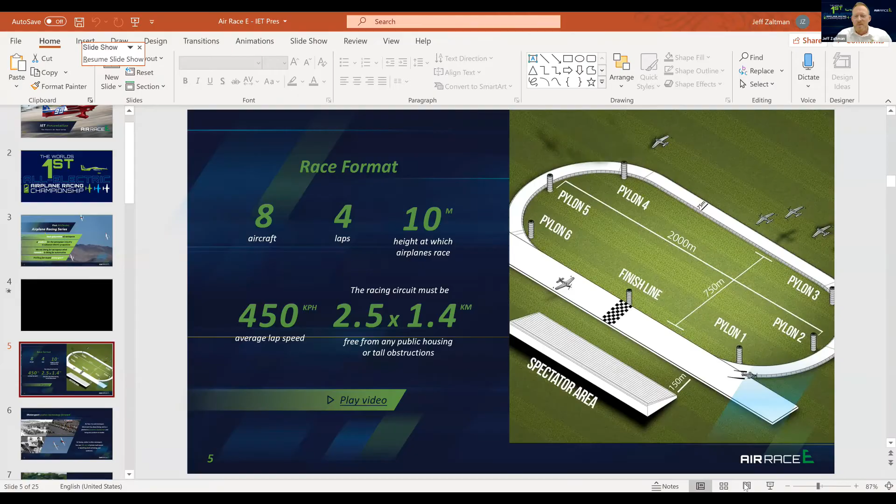Okay, so hopefully that came across okay. It's, as we said, a very exciting sport, and it's important to mention.

What you saw there was coming from a format we currently do. It's an air race called Air Race 1, a form of Formula One air racing. That's the format - it's actually a sport that's been around for over 70 years, a really, really successful race format.

It's super exciting. It's got 8 planes lining up on the runway all together at the same time, they drop the green flag, and they take off, racing from the start. They climb to about 10, 15 meters above the ground, up to 450 kilometers an hour around an oval circuit. The first one to cross the line wins. So it's real pure motorsport, really exciting.

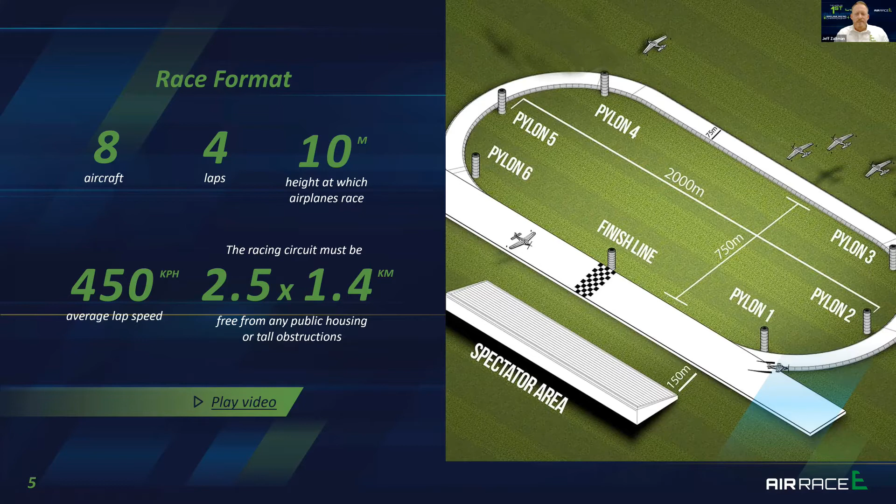And the reason that's important is because Air Race E is basing itself very much on the format of Air Race 1, this Formula One air racing, but of course readapting it for electrification. So what you saw there is very much how it's going to look on the electric side. As we said, it's very much a motorsport, real pure motorsport.

You'll all be familiar with the fact that motorsport throughout history has always been used as a very successful foundation for developing products, developing technology, bringing products to market, and innovation in general. And air racing, though not as well known as some other motorsports, also has a rich history and is very much part of the fabric of aviation.

Air racing goes back over 100 years, started in France in 1909, and has taken on different formats, different disciplines throughout history. But it's always been very essential, and also used, just as automotive or land-based motorsports, in innovation.

Perhaps one of the more famous examples is the Spitfire, which of course was one of the most famous and successful warbirds from World War II. That actually began life as an air racer - it was built for the races in the Schneider Trophy in the 1920s. So that was actually designed for the mission of racing before it was repurposed for battle.

And that's again what we're really trying to do - to hone technology for other purposes outside in the world. Of course, we're a thrilling fan-based sport, so it's a motorsport, it's very exciting, but we're really trying to also do something very, very meaningful.

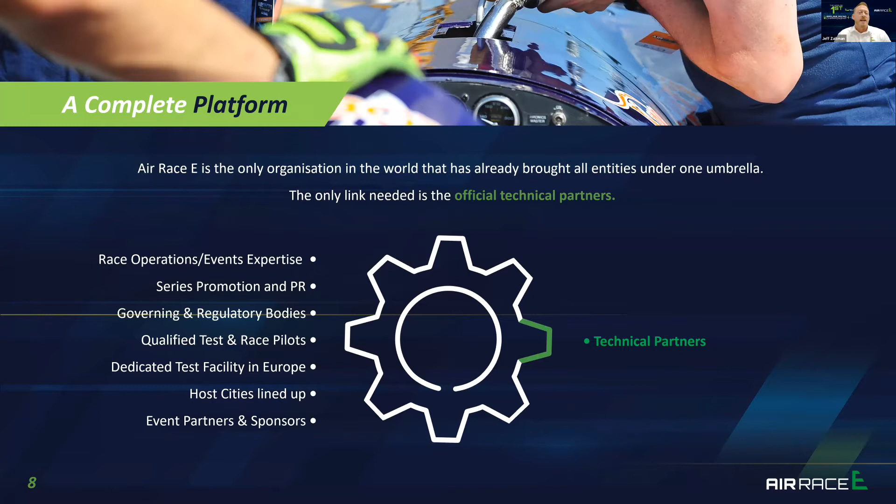Of course, what we didn't have was the technology side. So we're really fundamentally opening that up to the broader market to say, look, we need the industry to come in and start developing this technology with us to make the racing exciting and, as I said, meaningful. So we've done that, and we have a lot of success. We have lots of different companies involved, in different ways.

We refer to this as our stakeholder ecosystem, because some of these are suppliers, supporters of teams, partners, some of them are teams, and some of them are sponsors and partners of this series. Obviously University of Nottingham here is a very important partner of ours. A couple of others you can see here, which are clearly very critical partners, are Airbus - our founding partner. They came on board a couple of years ago, and they've done a really great job of helping us get off the ground.

And ANSYS, which is really taking a very hands-on and integrated role with the teams, helping them use their world-leading simulation software to really develop and help speed up the prototyping process for the team's development, to get them to the starting line so that they're ready by race day. They've been a fantastic support using their software with the teams, helping them use it as well.

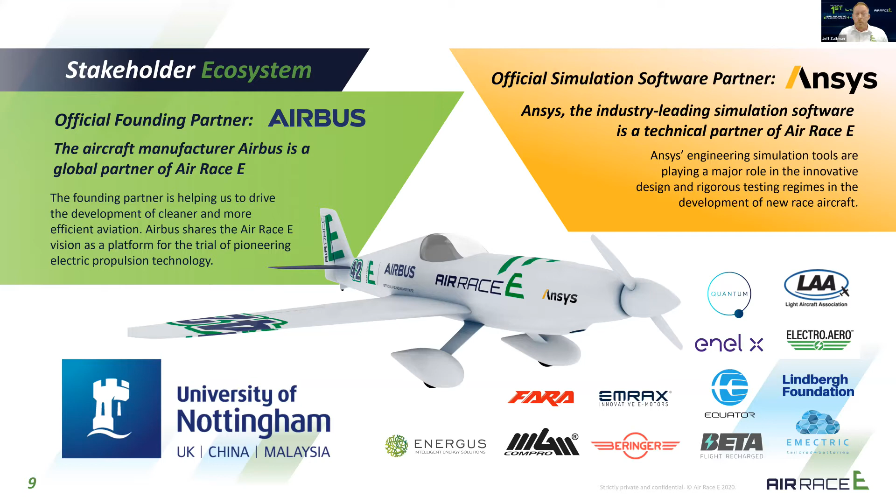Perhaps it's important to mention, I like saying Air Race E is a real world mission. It's a race—there's winners, losers, there's an objective, and you can measure your performance, success and failure. It's really important that we have this real world mission of a race to be able to push the limits of innovation. As you all know, when we talk about motorsport, it really is competition that drives that innovation.

So we've got to mention the rules here. It all really fundamentally comes down to the rules. What we do, as I mentioned, is base our rules on the Formula One air racing rules, which are the other races we organize, and just change what's necessary. Of course, there's a lot of safety procedures and expertise and good rules that have been baked in there for 75 years, so we don't want to change all that. What we want to do is convert it to electric.

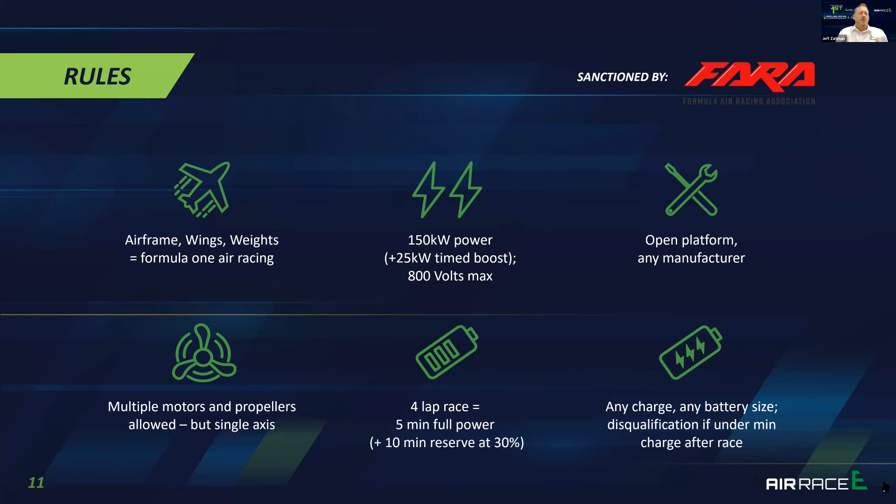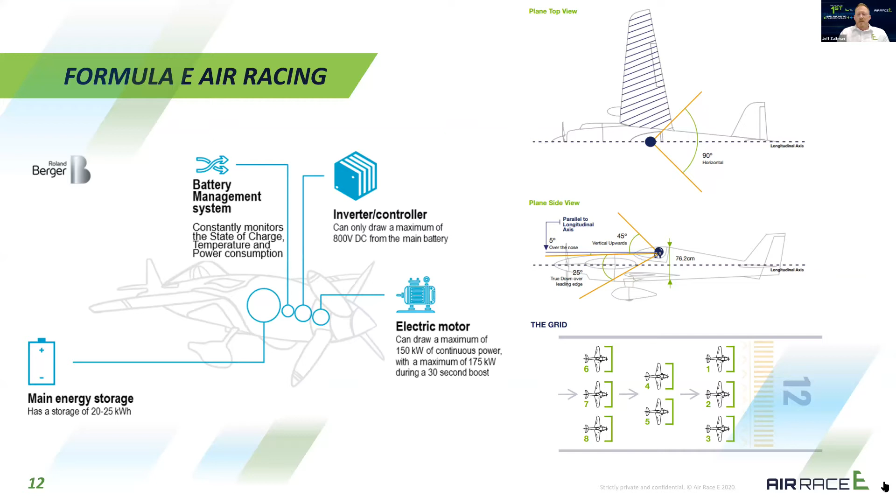So yeah, I'm going to come back in a moment. What I'm going to do is hand over now to Richard—he's got some really exciting, all the juicy stuff you want to hear about. And then I'll come back and tell you a little bit more about the teams and our future plans, and go from there. So, Richard.

So my name is Richard Glassock, and I work at University of Nottingham as a research fellow. I've been there about 5 years now, originally from Australia, and I've done some other work in Europe. It's a real pleasure to be invited here to speak for the IET, and thank you very much to you guys and to Rimesh. So let's carry on and see how we go here.

We have a real interest at the university in developing electric systems, electric propulsion systems in particular, and we have a fairly good footprint into the aerospace industry at large. To show some of the skills and technology that we develop, we wanted to have a demonstrator platform.

I met Jeff about 3 years ago, and we started to discuss how we could go forward, maybe together, and do our demonstrator at the university to help Jeff's ambitions in racing, because we could see how that would be a brilliant way to demonstrate electric propulsion technology for aircraft.

Jeff actually had the airplane flown into our local airfield here at Nottingham and handed over, and we brought it into the laboratory where we have a lot of good facilities to work on this kind of vehicle.

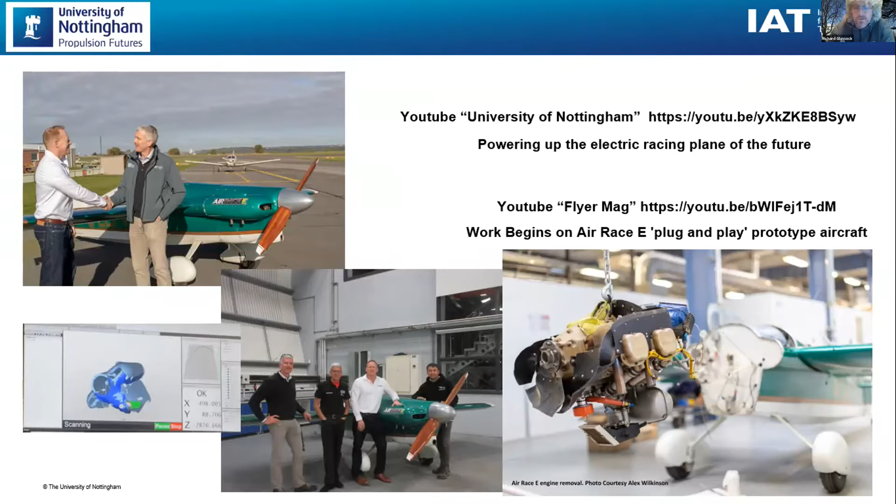We wanted to phase the project in two main stages, phase 1 and phase 2. Phase 1, which we're nearing completion of, mainly uses commercial off-the-shelf components for integration, forming a baseline for the aircraft to operate and for everyone to learn what's going on. We're happy to share all the details of that, which I'll go through later. Phase 2 comes after, when we start to develop a properly optimized, specialized system suitable for Air Race E.

What I'm showing you tonight is all phase 1 stuff, but it leads into a much more bespoke and custom development of electric machines and power electronics, and the integration of those with an emphasis towards being suitable for Air Race E.

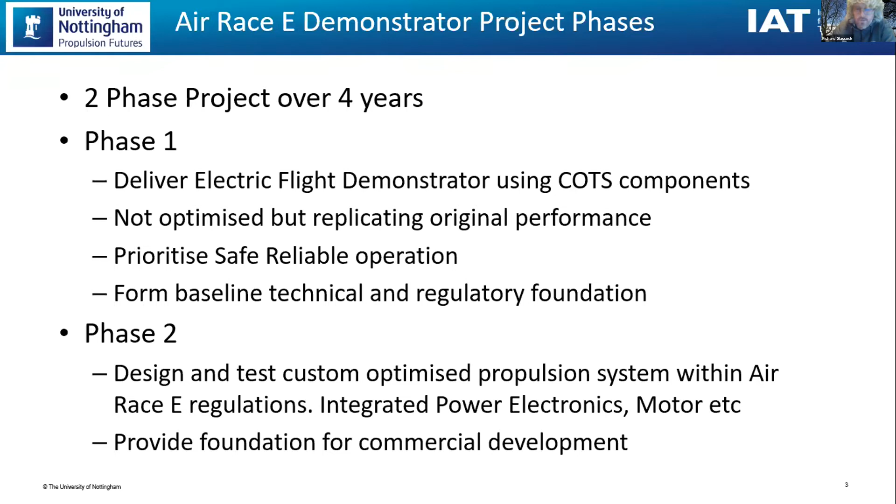The key components can be broken down into the electrical design, including the battery system, and the mechanical system design, so that we can integrate everything into that particular aircraft. There are also all the other management issues for procurement, which are not to be underestimated - they really do take up a great deal of the effort.

In order to build this airplane, the university does research predominantly into electrical machines, controls, and overall engineering, but we're not aerospace manufacturers and we're not aerospace specialists in terms of putting together aircraft. So we partnered early on with a local helicopter maintenance engineering company, just down the road, East Midlands Helicopters Engineering, who have been extremely helpful. At the moment the airframe is located there, but we're doing the rest of the work in-house in our laboratories.

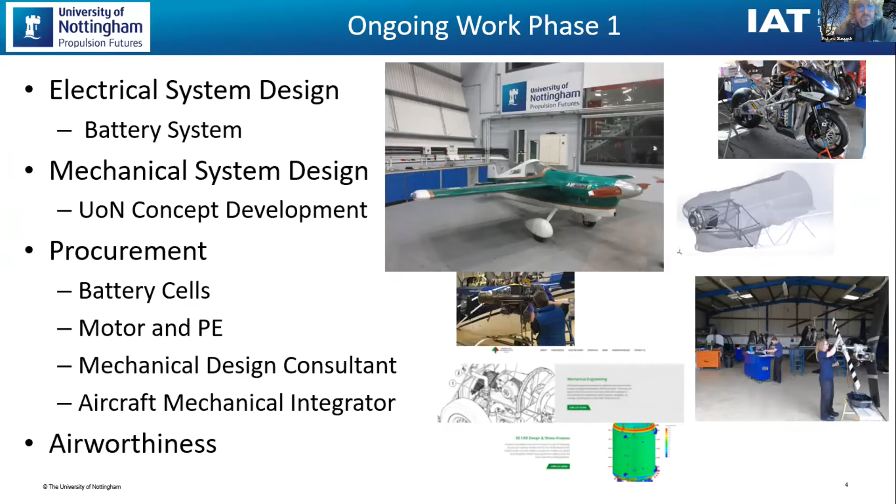As Jeff mentioned, there are the basic Air Race rules. We've got a maximum power, which is a good limitation to work to - you've got to have a baseline somewhere, and that looks pretty good. I want to mention that our installation in the first instance is not going to be 150 kilowatts - we're baselining about 80 kilowatts, because we estimate that's approximately the power the airplane came with. We know the Cassutt can fly quite easily with that amount of power with a standard engine, but it's not all about power.

So if you look at the basic relationships, you don't need to have a huge amount of power to still win a race.

Obviously, you want to have the maximum power you can, but if you have less power, it doesn't mean you're going to be uncompetitive, because there are a lot of other factors that go into getting around that course quickly. So I just wanted to highlight the relationships between drag and power, and how that works out.

One reason why this works at all is because the race time is relatively short, 5 minutes. One of the problems of electric aerospace in general is energy storage, which precludes a lot of the bigger aircraft for longer range, but really suits what we're trying to do here. We can develop that technology, which then enables and enhances future development of commercial aircraft, which typically require more flight time, although some could get by with 5 minutes if doing short hops, like an air taxi, which I'll talk about a little later.

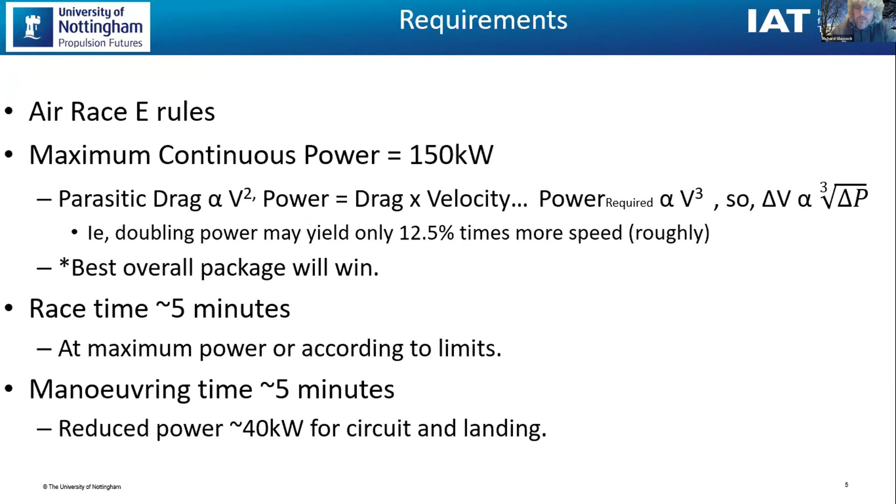And then there are some that were formerly Siemens motors, which are now Rolls-Royce motors. Very, very nice equipment, also being used in some projects. Again, it's just a little out of our league for our university at this time, and I hope they will become available on the market more generally as we go forward.

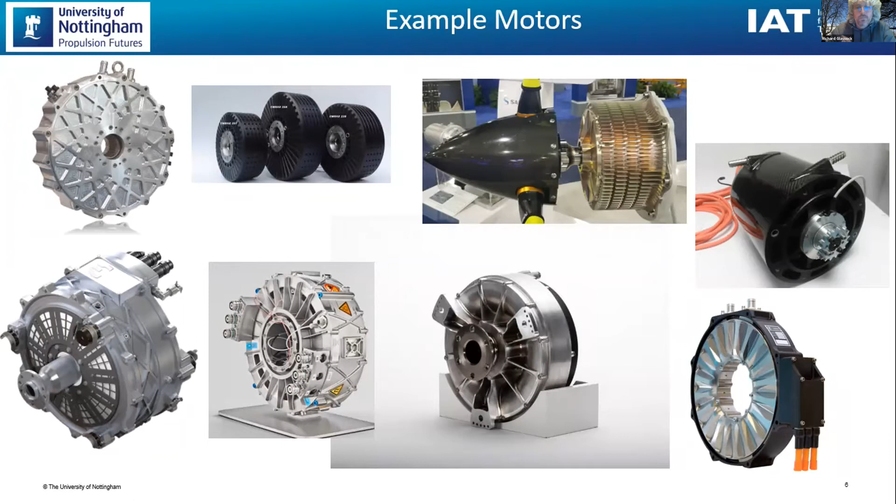So, other things you need to put this system together. Obviously we've got the airframe - a nice basic Cassutt unit, a very well-established aircraft, quite simple construction, quite easy to modify. We've taken the engine out and the fuel system out, and so we put the electric motor in to replace that.

The inverter, which drives the motor, takes the DC current from the battery and makes it suitable for this brushless permanent magnet motor. Unfortunately, in this case it needs to have a liquid cooling circuit, so you have to have a heat exchanger, a pump, piping, and some control of that equipment.

As well as on the inverter. So the inverter also has a separate liquid cooling circuit with a pump, a heat exchanger, and piping. You've got to have a battery system, which I'll discuss in a moment. The battery system has to have a management system, a BMS, battery management system.

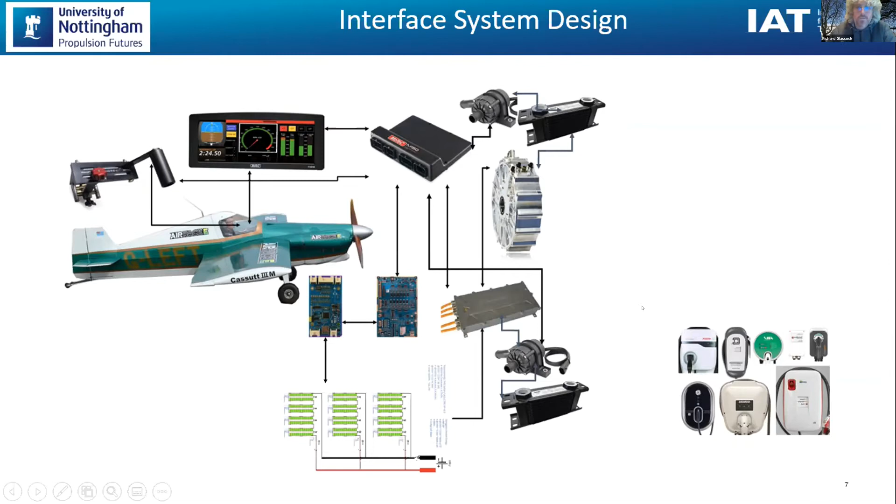And down the bottom right, obviously, we've got to have a charging system. So that's all part of the system that we're putting together.

This is using a pouch type lithium polymer cell stacked into modules with a proprietary, custom in-house designed circuit board that connects all of the tabs, puts bus bars between them, and carries other stuff like thermocouples and voltage sensors for each cell with outputs. And then you stack them all up and you put them in the vehicle.

And in this case, the vehicle goes really fast, and actually very nearly took out the Isle of Man a couple of years ago. It came second to a Mugen Honda and it beat the other Mugen Honda. And I think the budget was something like 50 times less, or 100 times less.

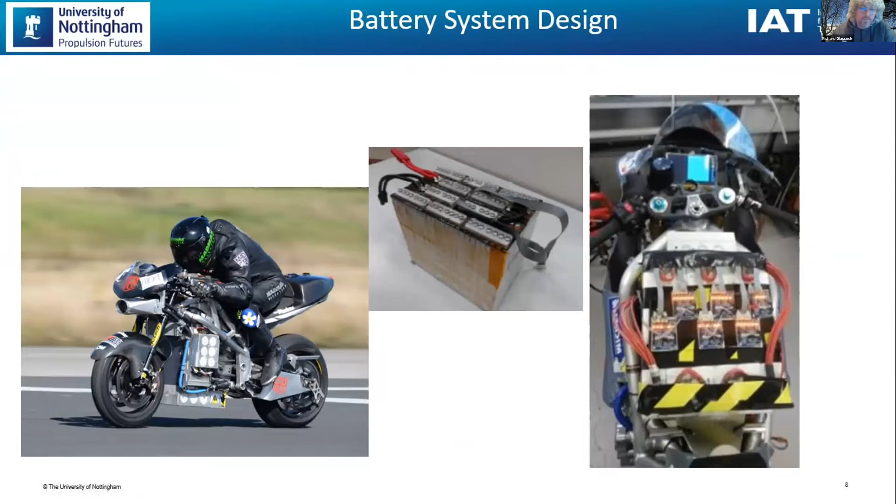So that's some of the background that enables us and encourages us to go ahead with the aircraft project. So a little more detail on the battery system. We didn't want to modify this aircraft very much in the first instance. We just wanted to do a very simple conversion, a basic one and a safe one.

So we simply used the space already available within the cowling mold line, took the fuel tank out, put in batteries where the fuel tank was, and obviously where the cylinders were in the engine, we have room there within the original cowling. So we used that space.

We made boxes that are made of a proprietary composite material that's very, very fire and heat resistant, and we'll be laying these battery packs within those boxes. It's not really efficient to do it this way. The other thing is we use the original Cassutt engine mount to bolt the motor to. So it's not highly optimized, but it's secure and a good way to begin the whole process.

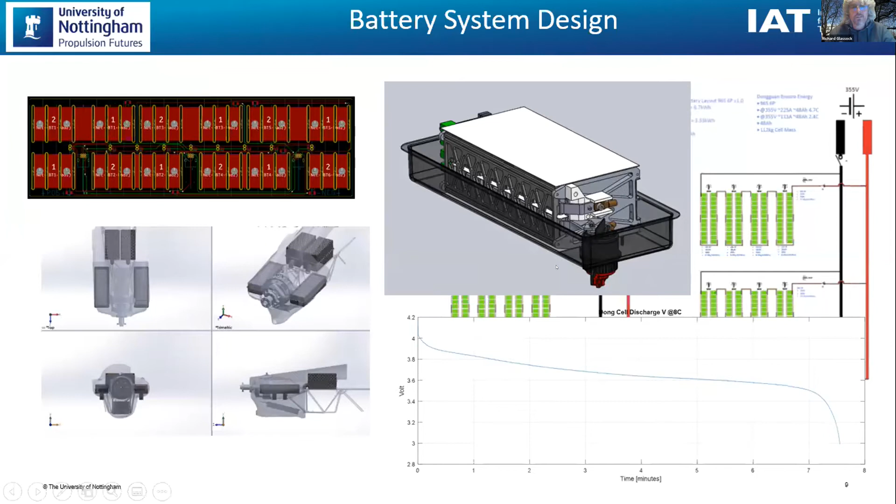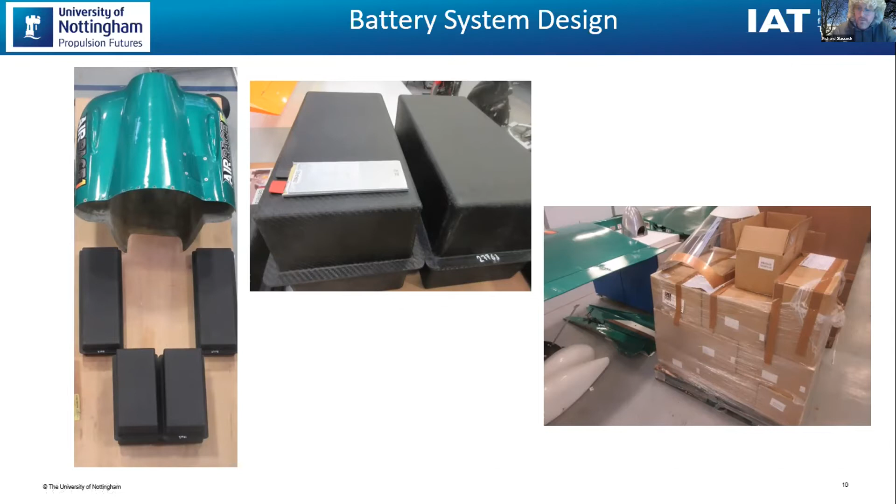Once you get the other parts of the battery system in, it really adds up, and we're probably looking at over 100 kilograms for the battery pack, but about 70 kilograms of cells, and we should get about 14 amp hours, or 10 kilowatt hours, from that pack. That's enough to do the initial tests we want to fly with, and for ground tests. I doubt it would be good for racing, although, as I said, this is for 80 kilowatts we're baselining, and all of the other factors come into play.

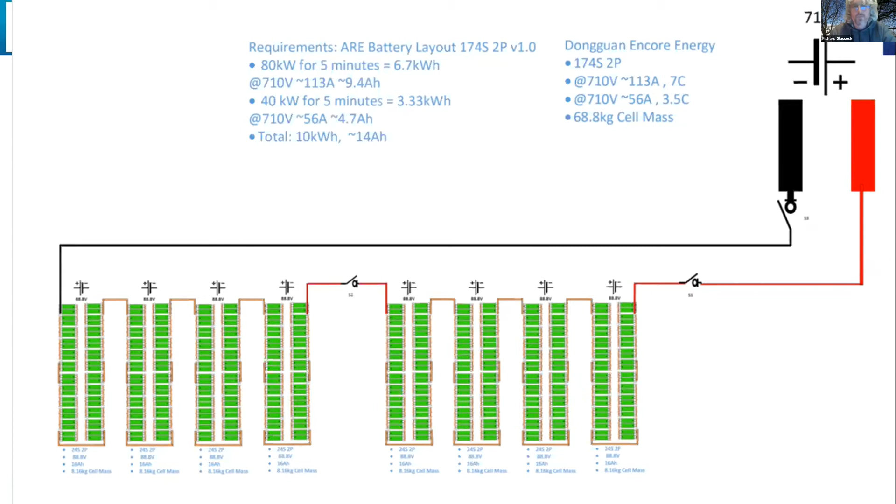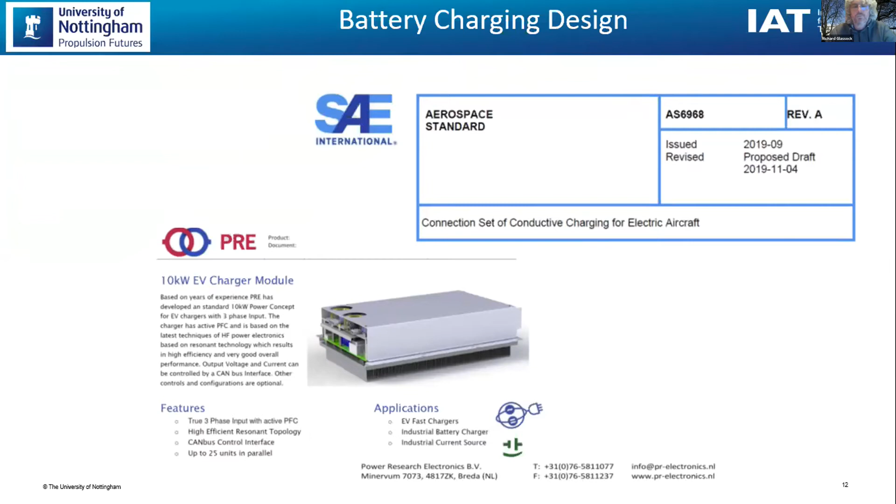For the charging system, and there are any number of other standards that need to be developed and provided so that we can get into commercial application for these things.

The motor just comes, as you would have seen in the picture earlier, with no outputs really. It has an internal spline shaft, so to get any other loads than torque onto that, you have to provide some other structure, mechanism, spindle shaft. So we've got a spindle shaft here that we designed, which takes a carry out of the spline from the rotor of the motor through a bearing set and then into a propeller adapter.

We didn't really want to have to mount too much external framework around that. It's a relatively large diameter motor already, considering the original cowling we've got, so it just barely fits in there. And if we started to put too much mounting around the outside, we were going to have to change the whole front cowl. So instead we run the loads through the motor.

Obviously it can take some reasonable loads, it's got to be mounted at some point somewhere. But we had to be very careful to spread those loads out and make a nice stiff bracket and structural loading system to carry all the propeller loads through into the original structure.

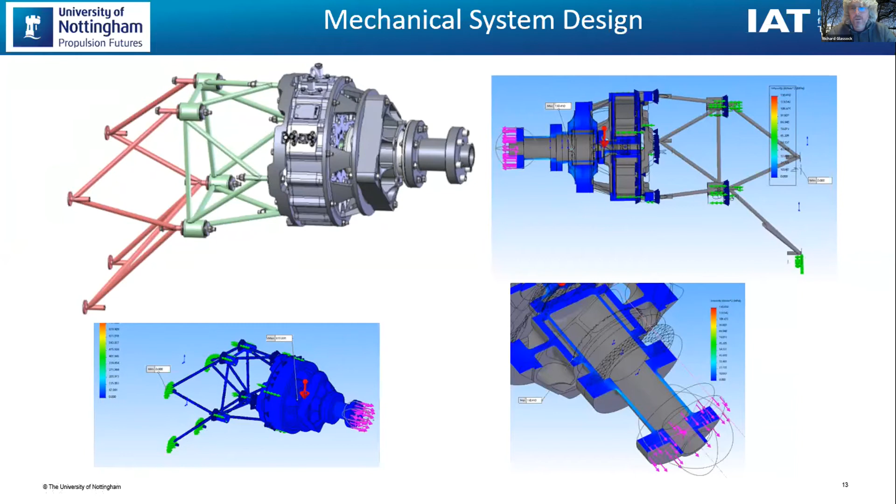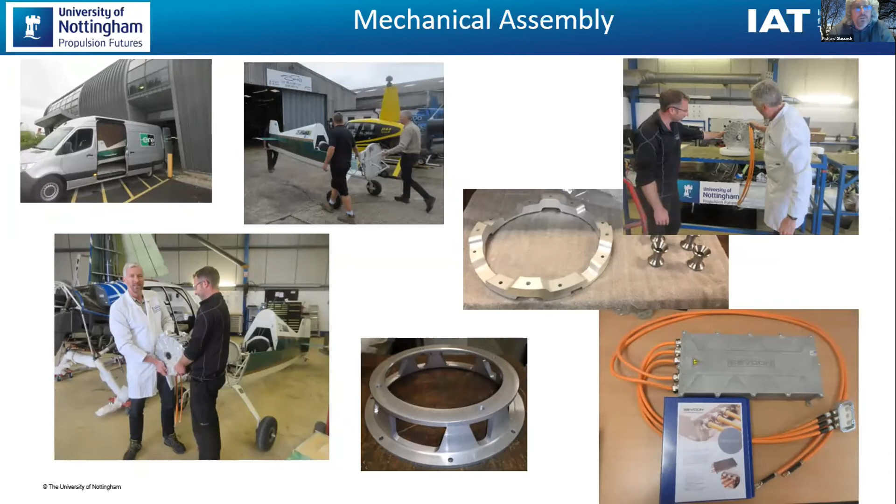So that's what we've got as it's built. I then took all of those components to our friends at East Midlands Helicopters, and they did the final assembly of that onto the airframe, just to ensure that all of the modelling we'd done in the CAD was suitable and was going to fit. It worked out quite well.

You can see here, this is almost a year ago actually, but there's been some development of the airframe. We've mainly, with the current world situation, been very delayed, and we have now got the motor and the inverter into the lab, and I'll show you that coming up soon.

But you can see how it fits in there - just as I was explaining, the structural layout of it, where the battery packs fit. We had to do a little modification, it's no big deal just to put a blister around it. Keeping the batteries in a rectilinear kind of shape just really helps, so it was more worthwhile just to have a corner poking out than to try to keep all of the battery compartments molded to the original fuselage shape.

And then you can see the other pack there, just ready to be fastened up, so it's a nice, neat installation. In fact, if you wanted to, and if you had to, you could easily bring this airplane back into the original form without too much trouble. We don't expect to have to do that - I think this will end up being an electric racer for quite a long time.

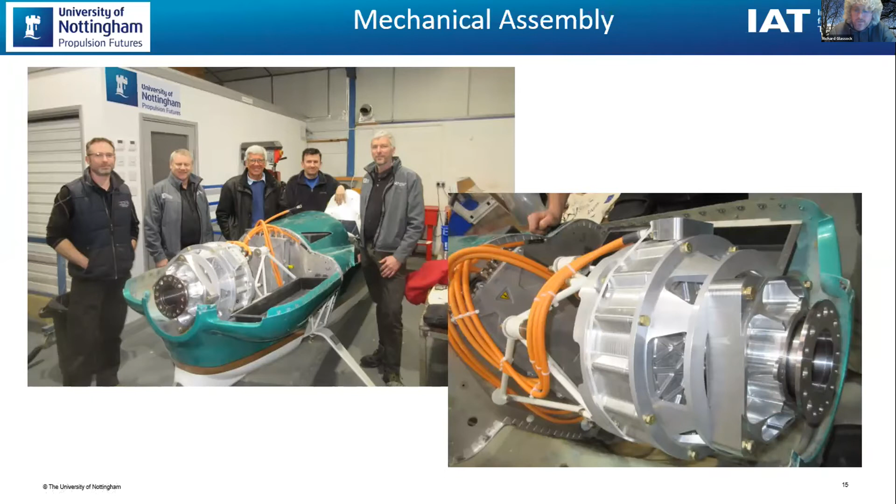So into the lab - we took it off the airplane once we established that it fitted properly and everything was right, and we put it onto our dynamometer within our labs. This is a normal thing that happens in the Nottingham labs.

Lots of different motor designs and power electronics are tested. It bolts up onto the dyno, onto this big bookend here. You can see the cooling system, and we have to run some desk fans really just to try to emulate a little airflow around that heat exchanger.

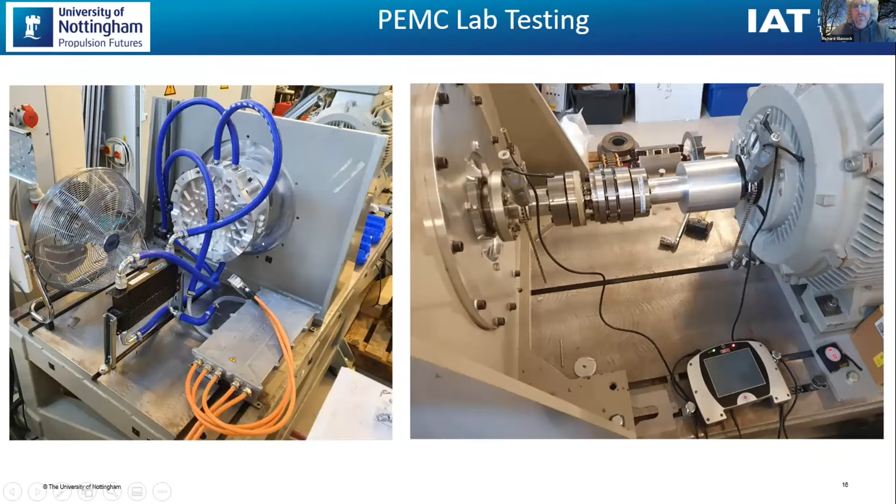In this picture you see we've also measuring the torque, so we've got a continuous independent measurement of torque. We can also derive torque out of the load that we're putting on it with the load motor, and I think the EASA also provides that information.

Now, hopefully this little video works. It just shows you the system running.

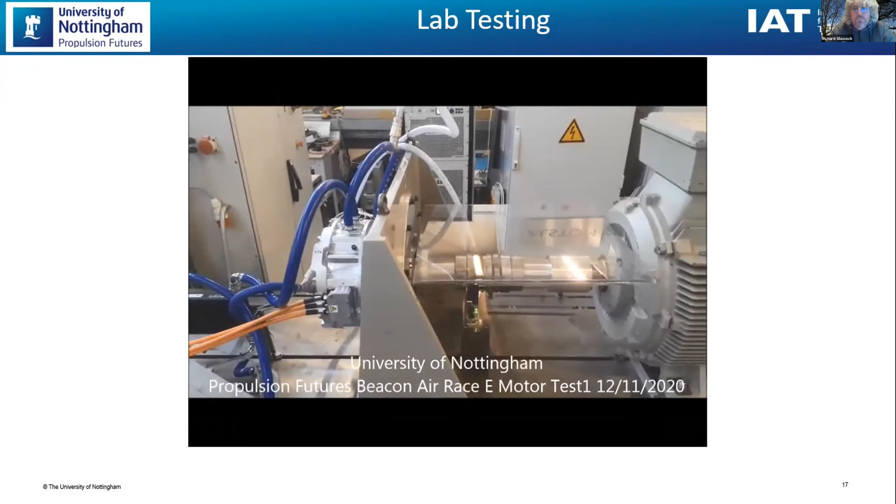Very quickly, it's running on the dyno in the lab, and we can load that. We can load the load motor. It's fully adjustable, programmable, by software. It's a big machine, that load motor weighs probably 10 times or so the weight of the motor we're testing. My colleague, Dr. Alessandro Galassini, is in there most days these days, working on it, fine-tuning the parameters for both the load and the EASA, so that we get a very good understanding of the characteristics, including the thermal characteristics, before we put it onto the aircraft. We can do practically all the testing we need to do in this lab.

Then once we put it onto the aircraft, we're very confident how it's going to perform, and we put the propeller on it, we start ground testing, and we ensure that all the system that I showed you before, including the higher level controller, is programmed correctly. There's a lot of variables, so you could imagine.

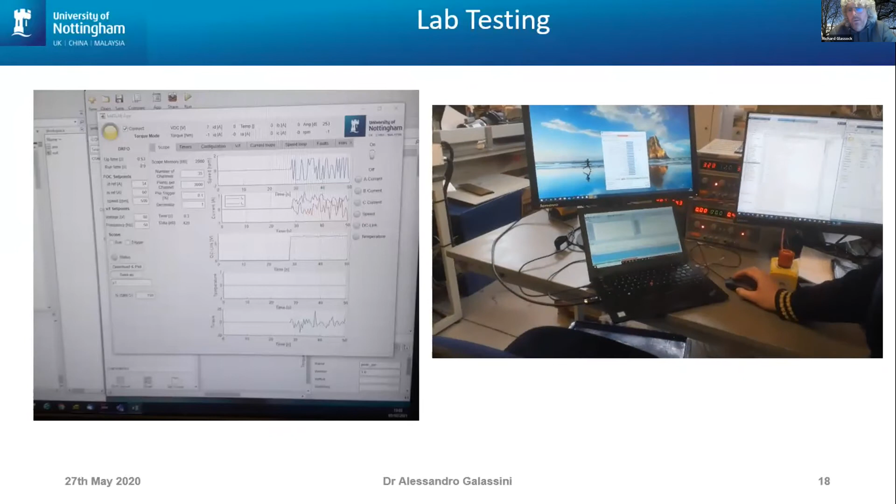So you could imagine the variable of how quickly does the motor respond to an input. The pilot throws a lever, like a normal control lever, and you can actually adjust how quickly the motor speeds up. You want to do that because you want to limit the torque at some point. You don't want it to try to come right up to full torque, full power instantly, or within less than a second. You probably want it to build up over 3 seconds. So that's what we're doing in the lab.

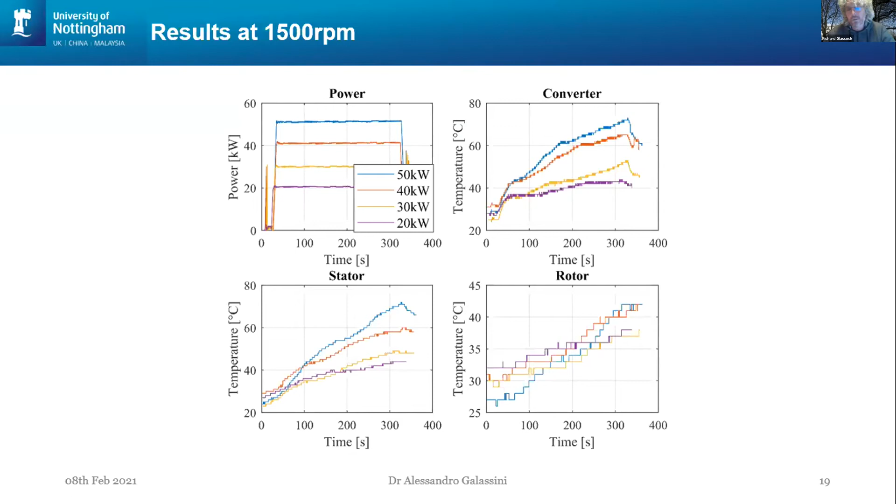Re-examine the cooling system. We've got people who can do that, model it. We can easily change out the heat exchanger, it's quite a small one at the moment. We know that when it's in the aircraft under different operating conditions, that's going to change as well. But this is the fundamental basic stuff that we'll get right in the lab, and then we'll move on to developing it as we do the ground testing in the aircraft and fine-tuning everything. Ultimately, once we're flying it, we're getting this and a lot more data to come out of it, and we can fine-tune the whole system, everything of interest, everything about the safety of it, but in particular the reliability of it, and the performance of it.

So I wanted to move on, I think we're doing fairly well for time. Just to tell you a little more about our facilities and how we're going to take this into phase 2, how we're going, the changes that are occurring in the university, the investment that's happening, so that we're confident we can develop an entire new bespoke propulsion system for this type of aircraft, and actually larger ones that I'll mention in a moment. This is a new building.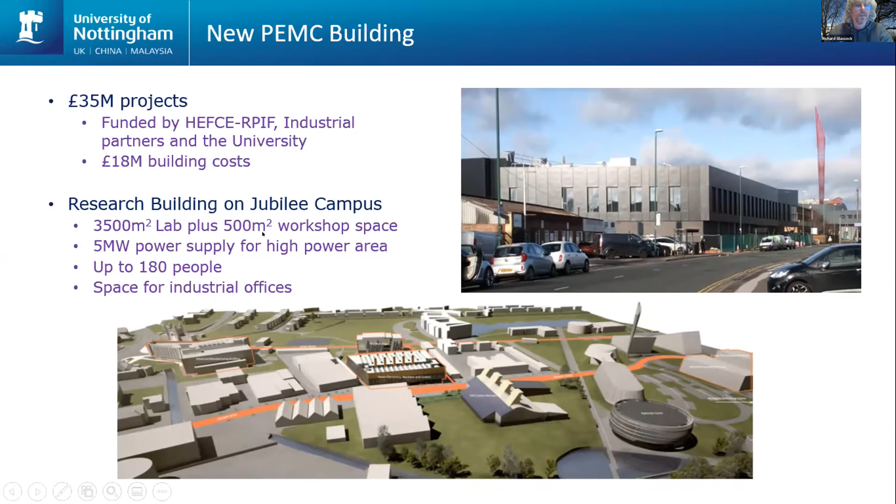So the lab that I showed you just before is in one of our older buildings on the campus. There's an entire new building being constructed. It's actually finished now, people are starting to move into it. You can see 3,500 square meters of labs. It's significantly larger than what we're working with at the moment, and it's all new with the most modern equipment. You can see where the funding there is from.

This just gives you an idea of the layout in this new building. I think it's approximately 5 or more times the amount of space that we've currently got. I can't go into all the details, but you can contact me or any of the other academics if you want full details.

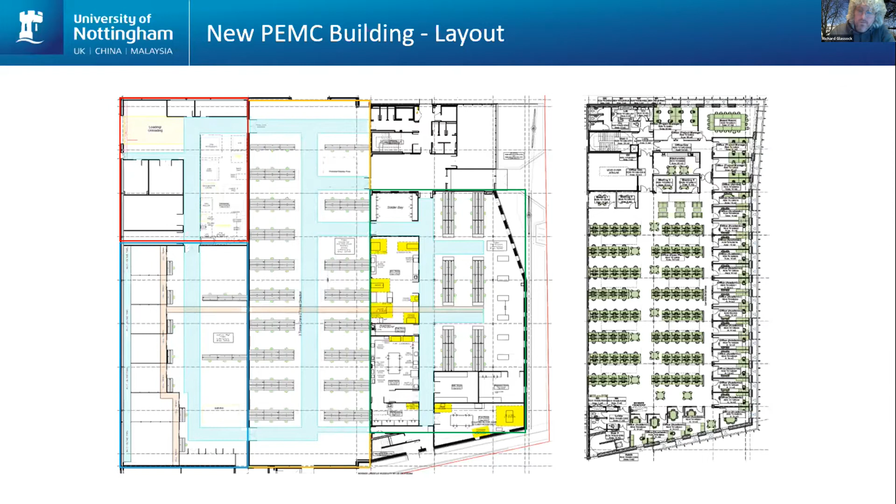The kinds of machinery that are going to be in there, the kind of power, we want to be testing and developing electric machines, that is generators, motors, and power electronics, all the way out to about 20 megawatts. We're testing roughly a 100 kilowatt motor at the moment, and you can see there are motors actually in our labs at 4 megawatts, but for bigger aircraft applications and other transport applications, it will be going out to 20.

So a little bit from the year before last. Some of the other background on the project: we went to Dubai and showed an aircraft there, a conceptual aircraft of the same type, Cassutt. You can see it's running a contra-rotating propeller system, and there's some very good advantages in doing that. These are actually the same type of Yasa motor, not quite the same model number, but practically the same.

There's 2 here, stacked back to back. They've got an internal shaft that runs to the back motor, an external shaft to the front motor, so you can run these contra-rotating propellers. The very key advantage of electric propulsion, particularly on a small aircraft like this, if you're running very high power, is being able to have a completely balanced torque output, which is really important for the handling of the aircraft. But it's got some interesting characteristics for larger aircraft too, and for efficiency.

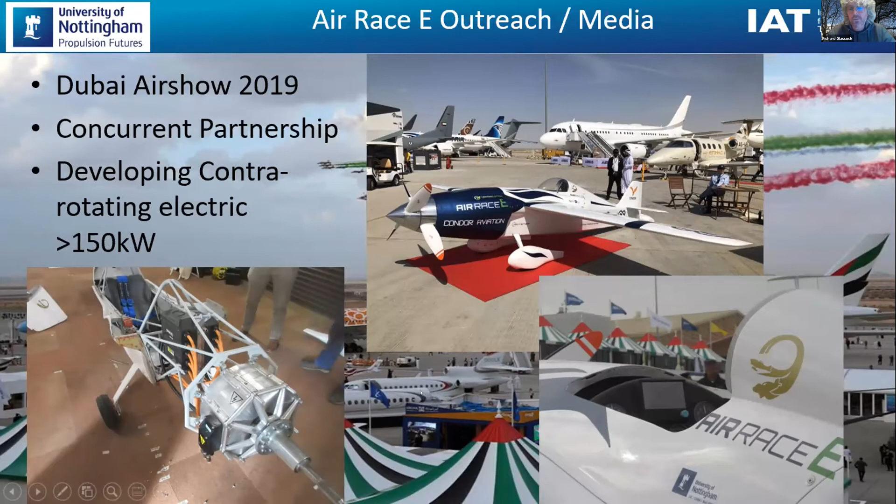There's a number of reasons for doing this, and it's one of the things we will probably look at when we go into our phase 2 development: shall we or shall we not go to contra-rotating? At least I think we're going to make it contra-rotating ready, so we might have one motor on our aircraft running single rotation, but in the future, if you wanted to put it on a bigger aircraft, you could have a contra-rotating system. This is an example of that.

So this is a project I am working on, and what we want for the project, and what we want for ARAC, is to yield results that are interesting commercially. I've done a lot of research and work with skydiving companies. I've got some very good partners who have run very large skydiving companies, and one thing they are interested in is electric propulsion for a number of reasons, a key one being performance and cost.

Obviously reducing fuel costs and the emissions that come from that. But with electric propulsion, it's really interesting, you can really improve the performance. In this example here, we've taken a Cessna 182. Now this is Photoshop, okay, we haven't built it yet, but we are planning it. And we know that the motors I just showed you on that Cassutt will fit into this aircraft.

When we run some numbers about how it performs compared to the original power plant, we're very, very pleased, and maybe a little surprised. With the original power plant, to climb to a good jump altitude, say 12,000 feet, maybe 14,000 feet, even a turbocharged version of this aircraft could take 25 minutes or more to climb to that altitude, and use quite a lot of fuel doing it, with the running costs associated with that.

So if we put in electric motors, we can put in a lot more power, and we can control that via the contra-rotating setup, we don't get control issues out of it. We may modify bits and pieces of the airframe, but there's practically zero residual torque out of this propulsion system. So we run a lot more power, maybe 300 kilowatts, whereas the original aircraft was around about 200. We then calculate the climb rates, and we can see it can climb in maybe 5 minutes to the same altitude.

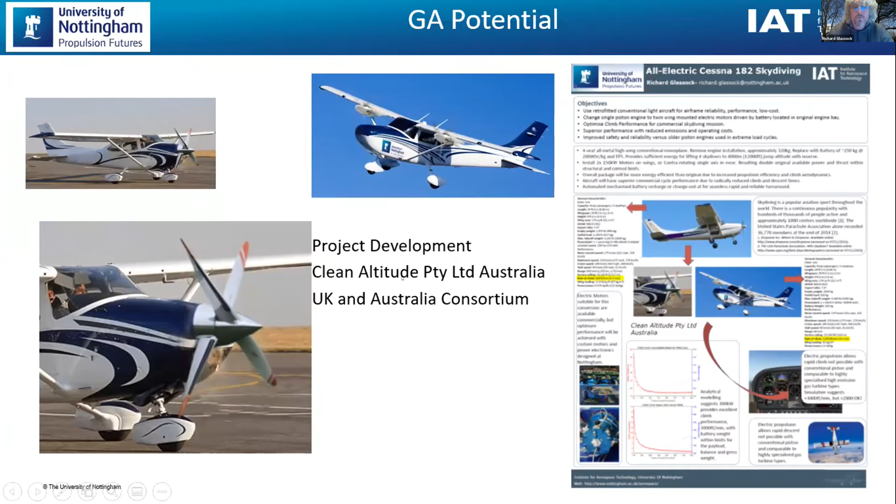So the cost and time savings, and where you're getting the energy from, etc., is very compelling. This is a picture of another potential layout, which is more complex, but having twin motors on the wing, you can get some efficiency advantages by decreasing the disc loading and increasing the propulsive efficiency, and again, you can run a lot more power and climb a lot quicker. So there's some very compelling future industrial applications for this work we're doing in ARAC.

Going to a larger scale, just very quickly I'll mention another project I'm working on: a larger skydiving aircraft, a 4-ton type aircraft. It's a hybrid, so you can run a gas turbine and use a generator system. You can run series and parallel hybrids. The types of motors we're looking at developing, 150 kilowatts as a basis, maybe developed out to 200 or so, would fit very nicely on this 4-ton aircraft, having one on each wing, a smaller gas turbine engine than you would otherwise need.

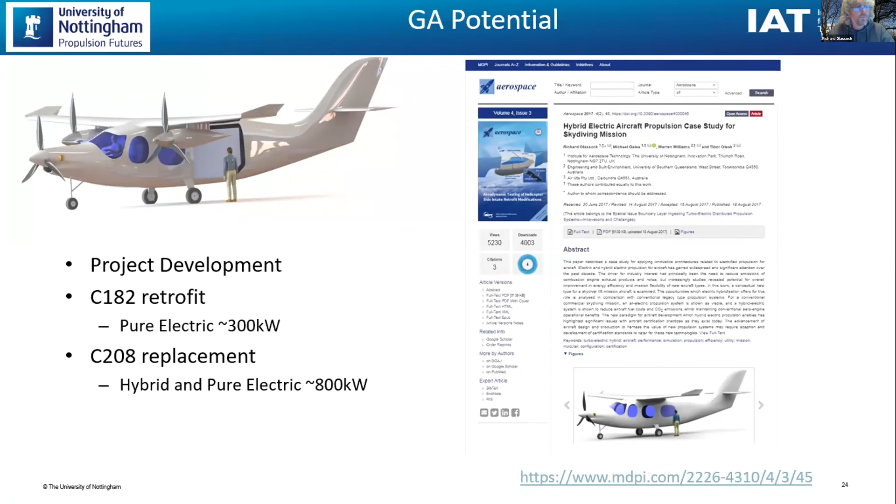And again, the performance numbers start to become very compelling, as do the economics once you start to investigate it. So it's all about what we are doing technology-wise for the future. Here is a broad spread of other commercial applications, some of which you may be familiar with, but they're popping up all over the place.

The industry is full of this kind of stuff now, and for very good reasons: from regional airliner concepts, commuter business type aircraft, whether they be pure electric or hybrid, vertical takeoff and landing air taxi type aircraft, improved propulsion efficiency, having distributed propulsion with a lot of electric motors. It's possible to mount electric motors in this configuration, whereas it's really not possible to mount gas engines. And you can see them all over the place - there's literally hundreds of them, maybe thousands by now.

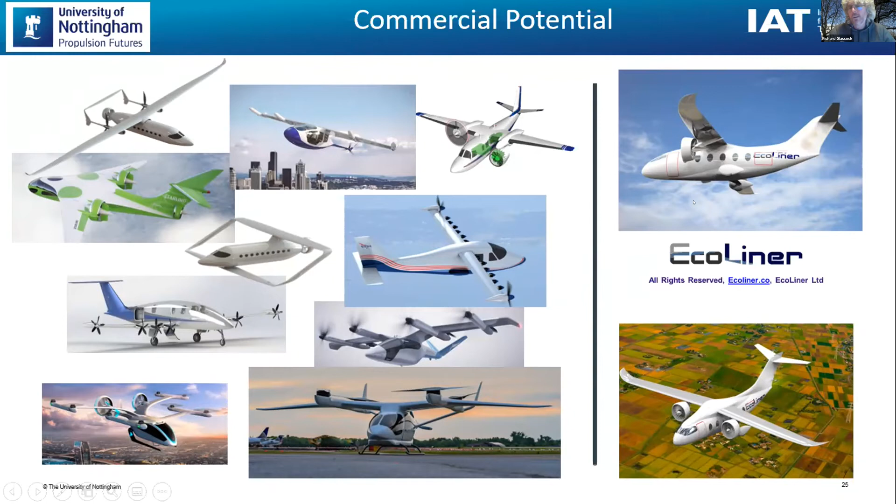I wanted to particularly mention this project because it's a UK-based project for a very compelling design for a regional, sub-regional pure electric aircraft. You can look it up, you can contact these guys. It's a well-developed concept. I mention it because certainly on a smaller version, the 9-seater, the power that they're planning to put through these electric fans is going to be possible with our development if you stack the motors. So you stack 2 or maybe 3 of the 150 kilowatt motors, and you've got enough to fly this aircraft, potentially also with contra-rotating fans.

So I want to draw it to a close there. I just want to show you this other example of a concept aircraft, which is my favorite. I've got a bit of a background in gliding and in hang gliding in particular, and this is a feasible aircraft because of electric and hybrid propulsion. It would have 2 propellers, two electric motor systems, and gas turbines, so hybrid systems here. It happens to have an open top as a glider, which makes it really interesting from the recreational and my hang gliding background. If you've not been into the air with a proper open top, open air aircraft, then you're missing something.

I wanted to do it with more people, so here's room for 6 people. But you can turn the engines off, and then when you need power, it's instantly available by the electric. You've got no warm-up, no startup sequence - it's just instant power, and it opens up a whole lot of new roles and missions for aircraft. So I'll leave it there. I'm hoping to get some questions, and I'll hand it back to Jeff to close it out.

Okay, thank you very much, Richard. Let's see if I can share my screen again. Yeah, great stuff. I have to say, I always am really enthused when I hear Richard present and talk about all the different projects that he has and the different technologies and advancements that he's making with our project, with the race plane prototype. It's fascinating, and they're doing really excellent work. And it's nice, like I said, to see how it fits into the portfolio and how all these technologies interrelate and are interdependent with each other. So it's really exciting to be part of that. And the University of Nottingham and Richard's team have been an invaluable partner for us over the past couple of years in developing it, but not just the hands-on stuff, but the strategic and the brainstorming aspects of it. So thanks for that, Richard.

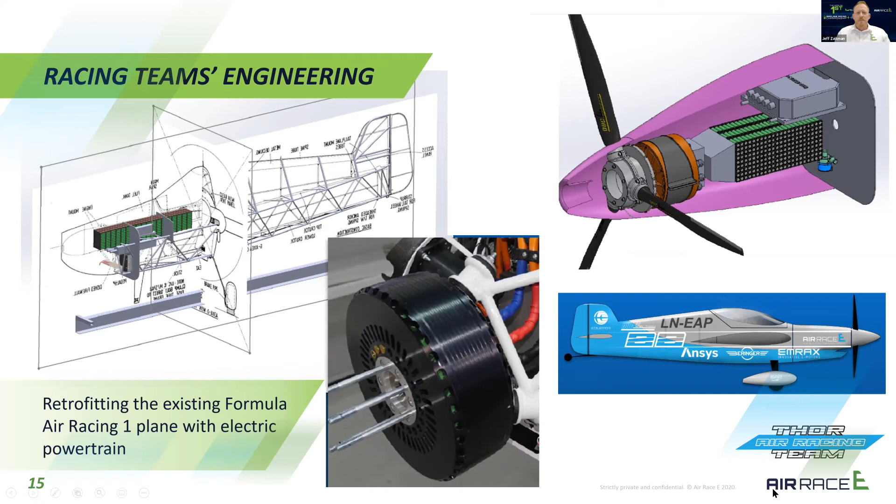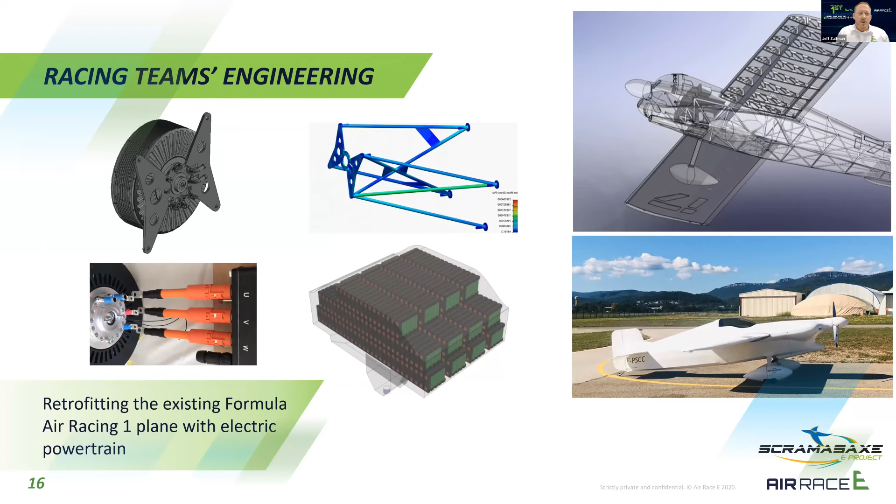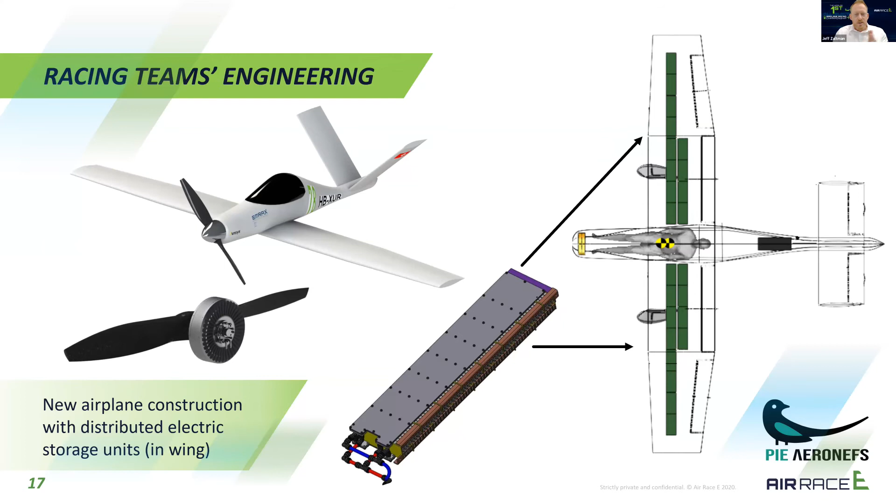This is Team Magpie from Switzerland. Now these guys have a completely ground-up design, so this is all their design, not just the aircraft but the powertrain itself as well. You can see the diagram here, they're actually distributing the battery throughout the wings, so that's distributed in a different way than the firewall-forward mount the previous ones have used. And obviously it's noteworthy there, they've got the V-tail, which of course takes away surface area and can decrease drag. So these guys are a really exciting professional team that also have ambitions in aircraft production afterwards.

Team NL are obviously Holland, the Dutch team. This is another ground-up design, so this is actually all ground up. It's kind of obvious there that they're also using a contra-rotating system - two coaxial motors, very similar to the one that we had displayed in Dubai that Richard had pointed out in those images. They're looking at a contra-rotating system for better power management, to balance out the torque, which, as you know, in electric can be quite intensive.

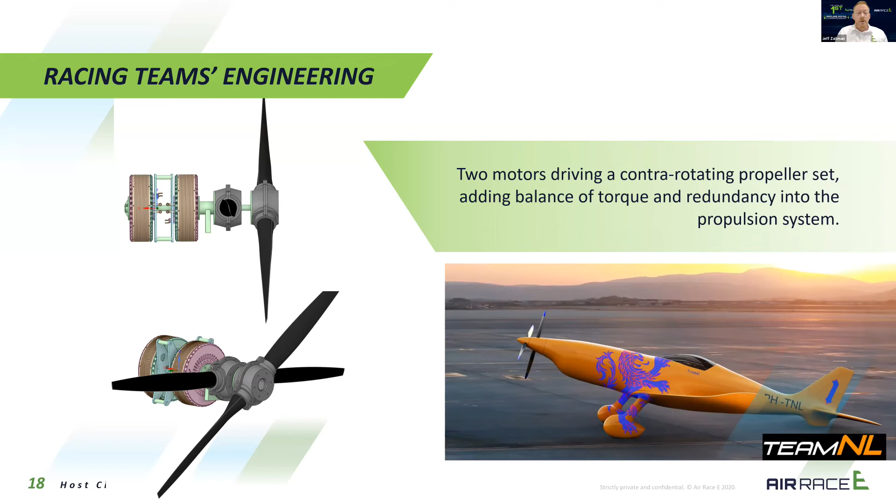Team Mobius, these guys are out of the US and Texas, and they're really concentrating solely on producing motors, this particular motor here. So they're in the race to develop the technology that they also want to on-sell eventually as a product in the marketplace. What's exciting about this is they've taken out 85% of the steel from the motor, and they say that this is the first-ever paper and 3D-printed motor. So obviously that brings with it many efficiencies, and that's an exciting development they're working on.

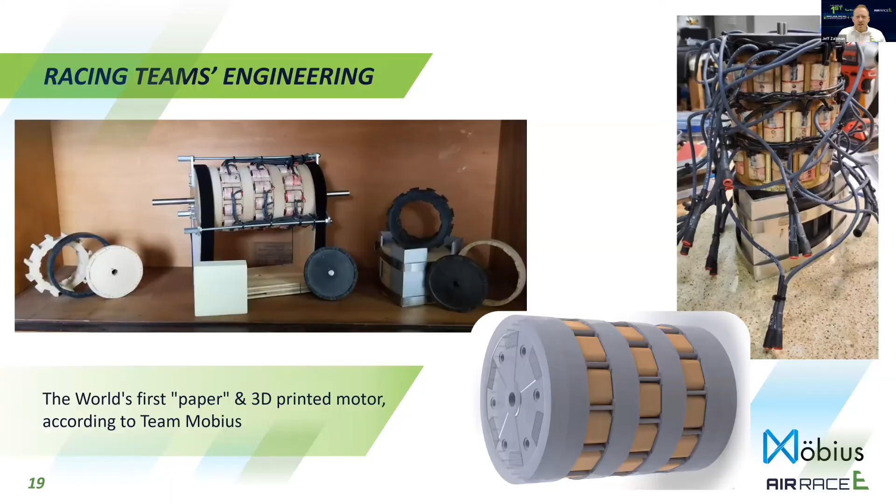So lots of things come out of this series, lots of different technologies, different approaches. Like I said, it's an open platform and an open concept - as long as you meet the formula rules, you can connect those dots however you see fit, which allows for massive amounts of innovation. But we're not just about tech - just quickly, we've said it before, it's a spectator sport, it's exciting. We're going to be on TV all over the world.

This is going to be reaching audiences live and in media throughout the world. We're going to be starting racing in 2022, so we're already racing next year. We're right now doing a bidding process with different host cities around the world, with a fantastic amount of interest and participation. We're also doing some qualifying activities this year, and eventually the plan is to grow to 8 races in a series on an annual basis in all parts of the world.

We've been garnering tons and tons of media coverage. It's really great to see that when we have a vision and an idea and we're stepping forward, all the people putting in so much effort and resource into making this happen are getting recognized. Even just this group today, so many people attended and signed up for this IET event, and we're super grateful for that. So we're getting out there into the media, really trying to share our experience with as many people as possible.